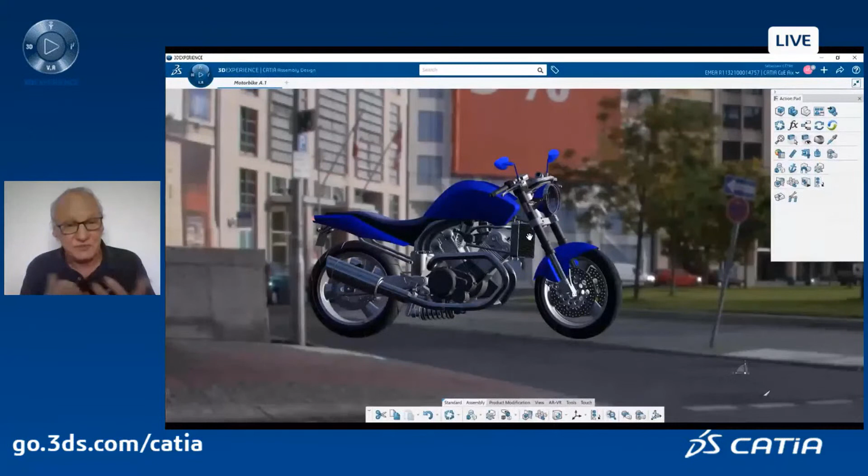not for commands. But I use something which is called the action pad, where you can gather all the commands that you are mainly using during a design. It can be commands from part design, which is solid modeling from CATIA, or commands from generative shape design, which is surface modeling from CATIA, or maybe other apps.

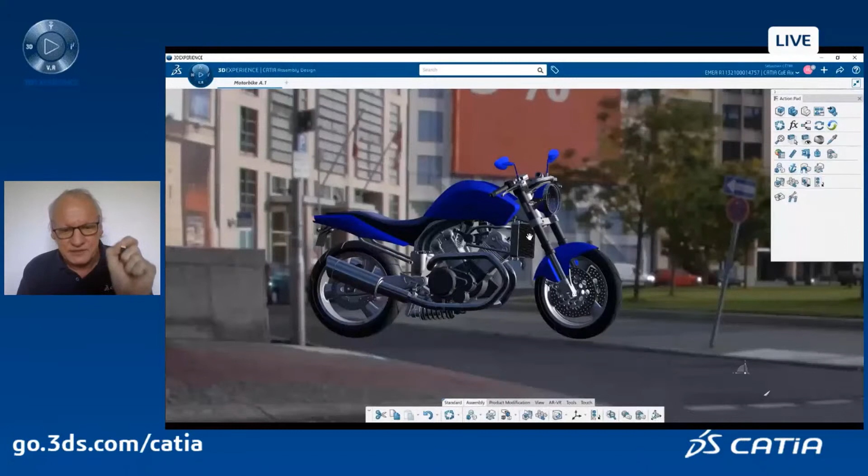And you can gather them in an action pad. They are default action pads, by the way. And you can either dock them, like what is done here. I docked them on the upper right side of my screen, or those action pads can be popped up just where my mouse is located, just by hitting the B key on the keyboard. It's not what I will use. I will use the docking capability of CATIA.

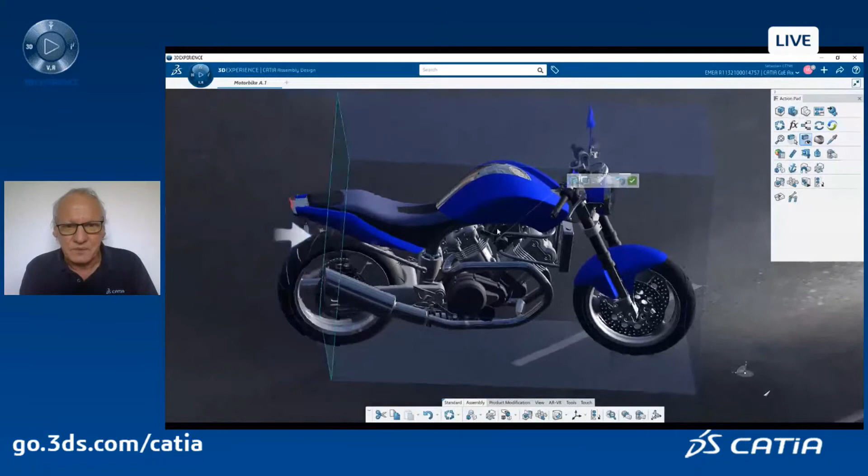Let's start. So this is my motorbike, and I want to work on this particular braking system, the brake caliper. Okay. First thing, I will select visually my context. I will define my working context, and you will see a very nice capability of 3DEXPERIENCE CATIA, which is a display of what I don't need in a ghost way. Okay, so what you see in dimmed or transparent white is in fact in ghost mode. But at least I know where I am in my full assembly.

And I can, for example, add a new view in my working environment. The view of this context can be shifted to another screen. You know, most CAD users today mainly use two screens. If you are using 3DEXPERIENCE CATIA, you use the two screens, either to display, for example, the assembly and your part, or some menus, because you can also dispatch some menus to other screens. So it's very, very flexible.

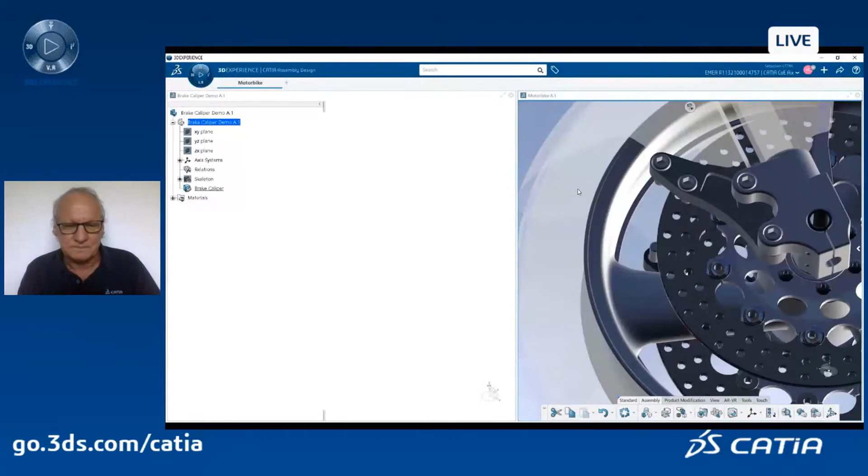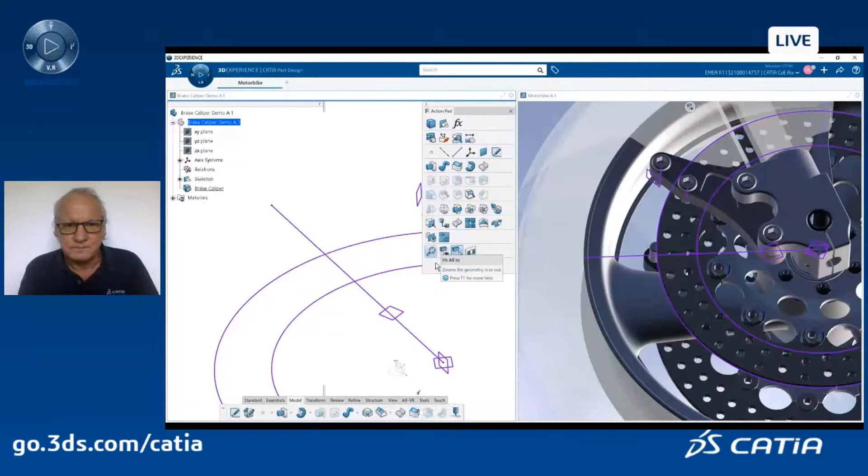So let's see what it does. So here I display, for example, my starting point. I start by defining a skeleton, which is a very traditional way of working with CATIA. And of course, I can see the skeleton at the part level, here on the left side of the screen, or at the assembly and context level on the right part of the screen. And there will be a permanent dual display of what I am designing. So let's start the design.

Maybe you did not see that, but I click on a plane, and automatically CATIA prompts me, what do you want to do with the plane? Probably you want to do a sketch. And I say yes. So I don't have to go and click on the sketch icon, which might be somewhere, maybe in my action pad, or maybe not.

You see here, sketch. Now I'm defining my sketch, and all my commands of the sketcher are also popping up in front of me, close to my mouse location and my click, proposing some commands depending on what I clicked. This is what we call the contextual immersive commands. Very nice capability. So I start my sketch. As you see, here I can also use the commands which are in the action bar, on the lower level of the screen.

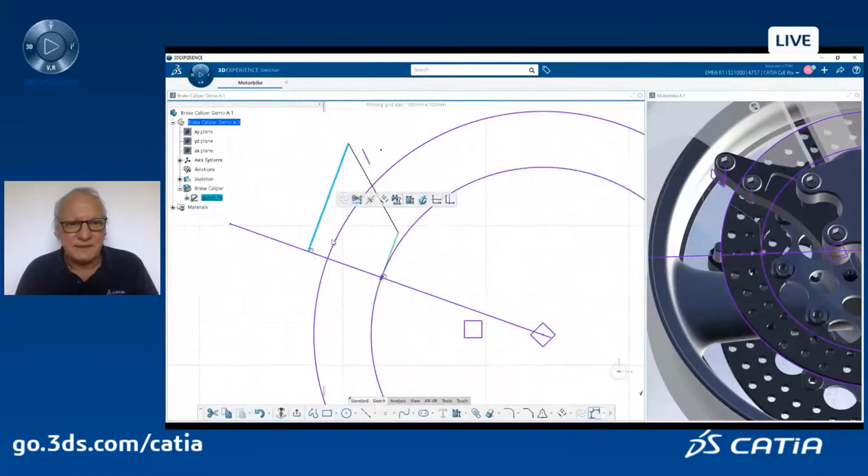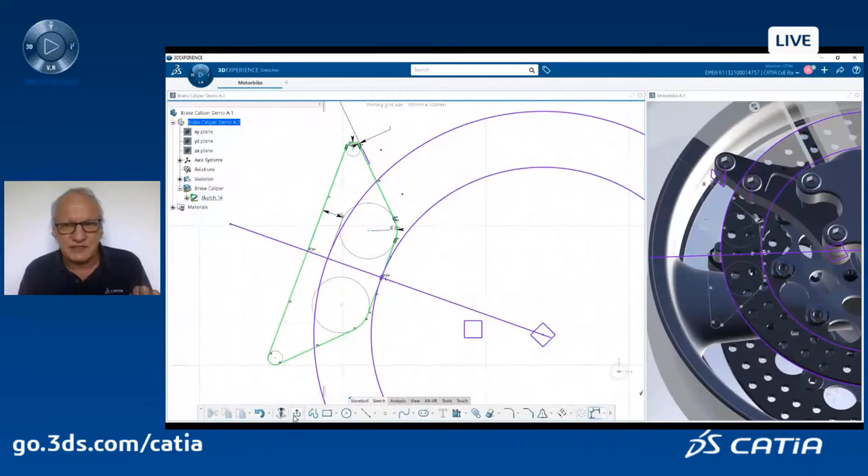This is typical design of my sketch. I define some constraints, some offsets. I define some fillets. I will also mirror this half sketch because I would like to have the complete sketch. And you see, I do not click. My mouse mileage is very limited. Okay. Here we go. I sketch. I do the mirror of this area, and now I leave the sketch. Okay. Of course, on the right side, you see exactly what I did at the sketch level.

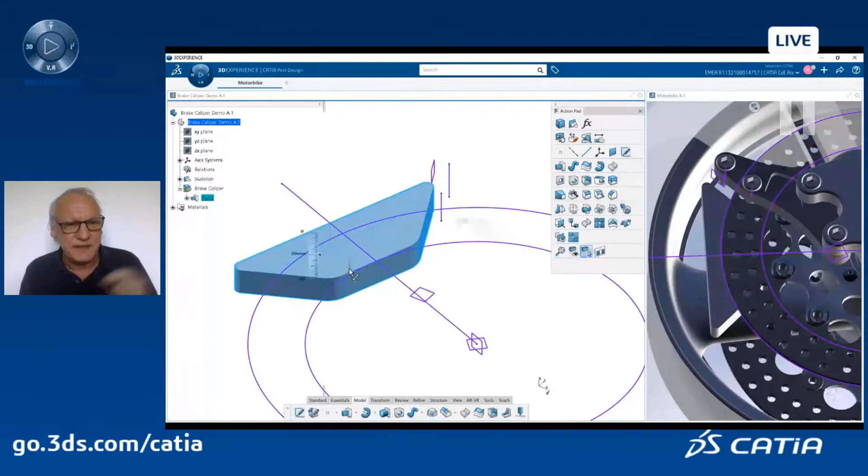Now I click on the sketch. The sketch was selected. So CATIA proposed to me, you have selected a sketch, maybe you want to make a pad, which makes sense. Yes, I want to make a pad. And then I just need to select the direction of the extrusion and the value, the thickness of the pad. And I directly type in the command, and CATIA creates a feature pad in the spec tree.

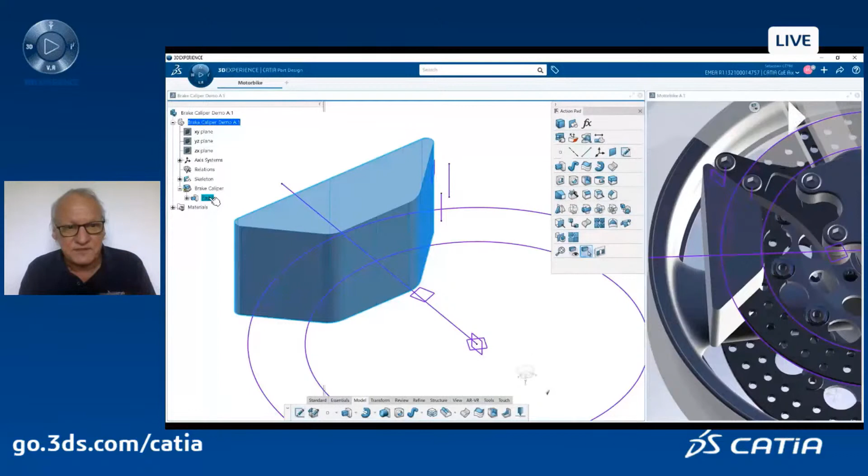Okay? You could have done exactly the same with a traditional, let's say, CATIA V5 way, where you click on the command pad, you have a dialog box popping up, you enter values, and then the feature pad is aggregated in the spec tree. But here it's much faster. Here you see the pad dialog box that you can use if you want to add more advanced details in your pad feature.

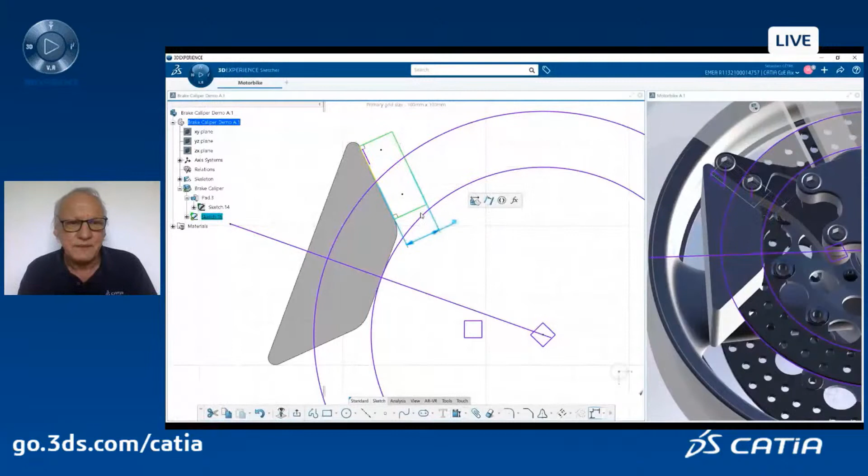Here we go. I click on this plane. I accept the sketch. Here I just project an edge of this newly created pad into the plane. And I just add some constraints on my sketch to fix it, to dimension it. And I will create, as I did earlier, another pad. This is the value of my fillet.

Here's the sketch. As the sketch was constructed on a face of a solid, now I have two options. Do you want to create a pad or do you want to create a pocket? I create a pad, I select the direction and the thickness very easily. No dialog box, just everything is done directly on the graphics in 3D.

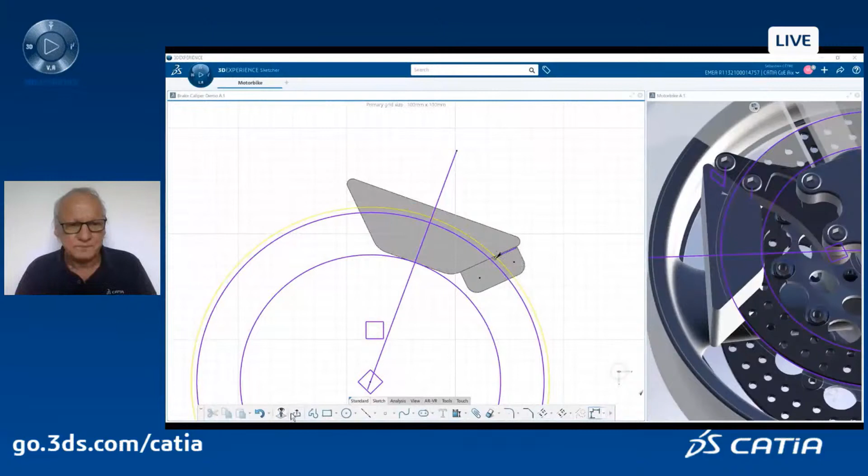I continue the design of my sketch and my solid. I am here in the sketcher of part design. I create some offsets. You see, it's very simple, very straightforward. At any time, if you need more advanced capability, you can use the advanced capability of your action pad. You can also hide the action pad.

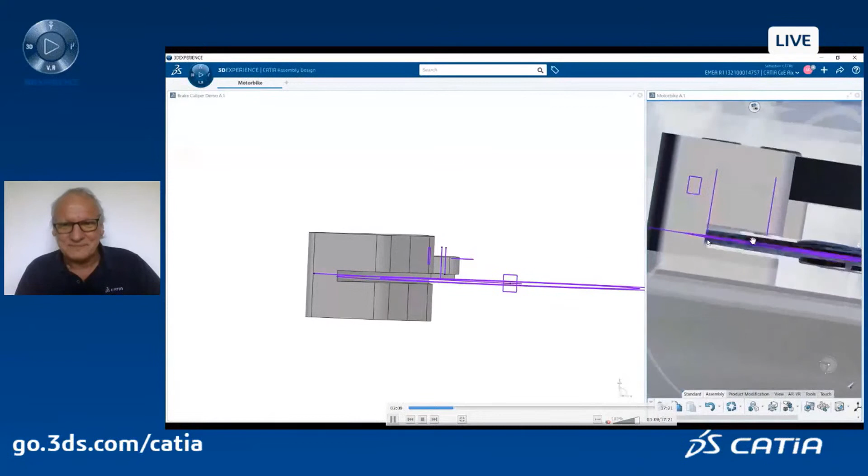Here, I just create a pocket to remove some material inside this block. And you see here on the screen why I did that, because I wanted to take into account the brake disc itself. Makes sense. So it's why the context is very important. You never design a part alone. It's always inside a context within a given assembly.

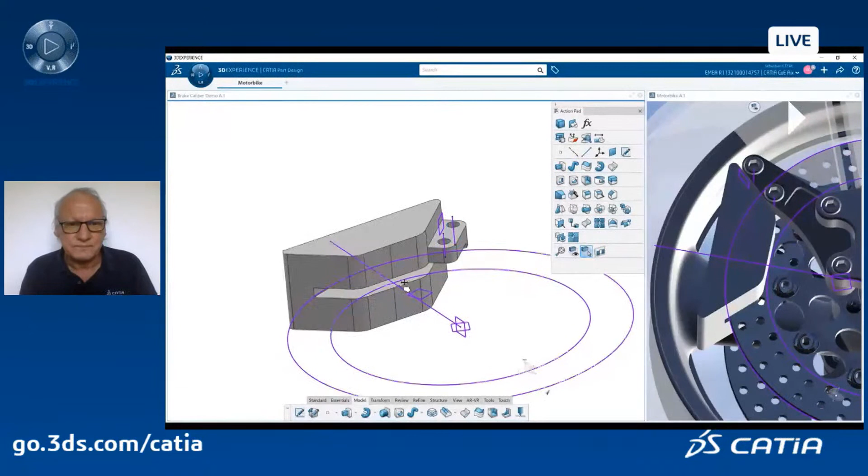Here, by just clicking on a face and this line, I can create a hole because the inputs were the direction of the hole and the starting face. I just select regular holes. Here we go.

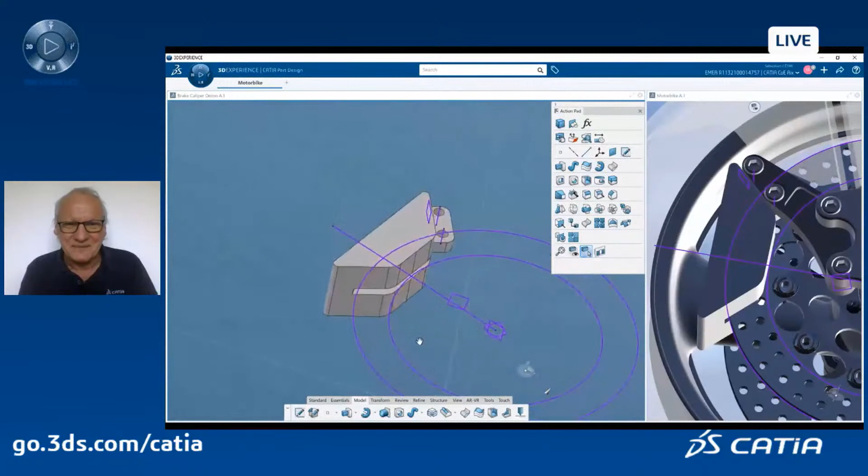Very nice capability also of 3DEXPERIENCE CATIA is that I can change at any time what we call ambience. You will see what I mean. An ambience can be, for example, a dark blue background. Traditional way of working with some CAD tools. But I can have a more fancy way. Maybe my part is designed inside a given context. You can define your own context. And I can come back to the basic, which is white in this particular case.

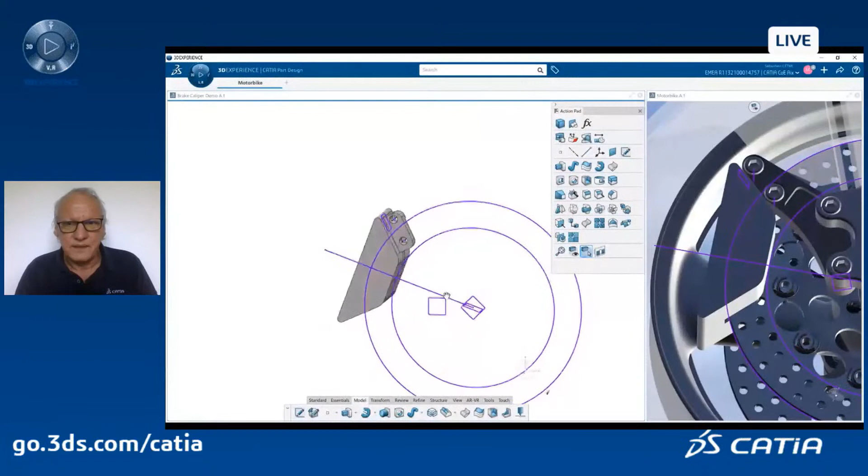Now that I'm okay with that, I will just erase my context view and just work with the design view. Here I can at any time undock some commands and dock them where I want on the screen. It's very simple. So you see here the refine command with the chamfer fillets.

I can add as many commands where I want, and those menus can be also attached to another screen, for example, if you have two screens. And of course, if I am a little bit messy, I can come back to the predefined position of those action bars.

Here, I create now a new body, which is my brake pad, because you will see that in this particular way of working, I will just, at a concept level, work in part design, in one part, and create multiple bodies, which will be, in fact, my future parts within a given assembly. And you will see how easily we can create from a part with bodies, an assembly with parts. Let's have a look, but let's first continue the job.

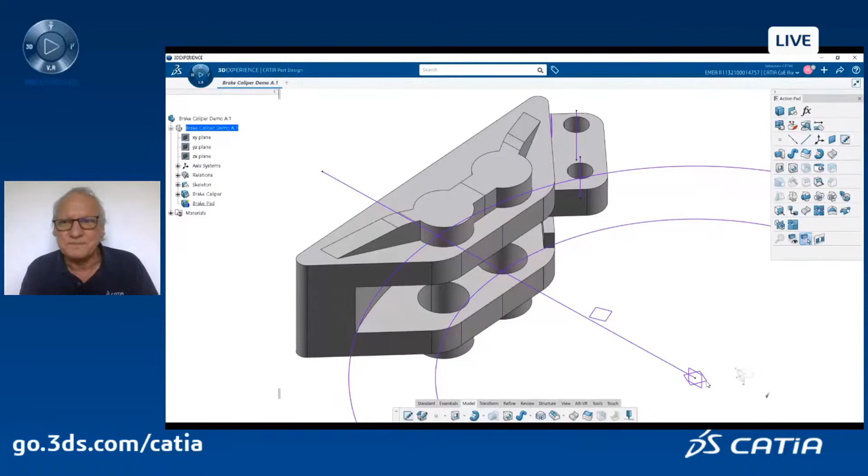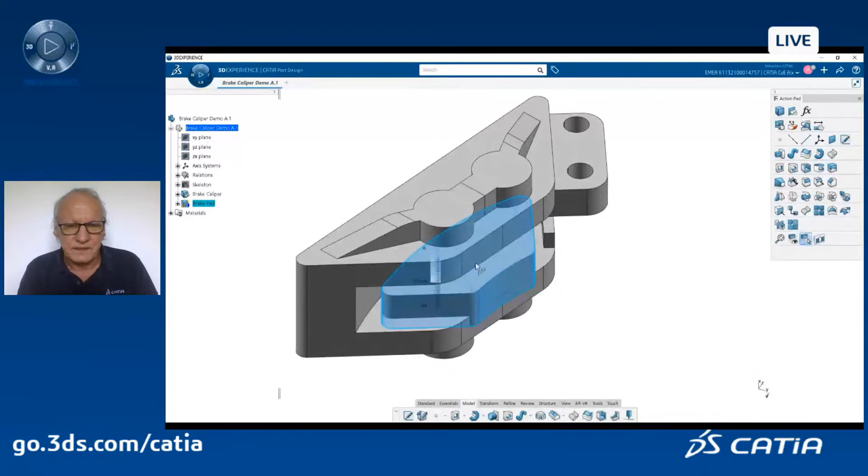Here we go. I create a sketch. I design my sketch. I guess now you are familiar with that. It's very easily done. And I will just create the shape of my pad. You see, as I click on my shape, I can create a pad. Here we go. And this is in my brake pad, another body.

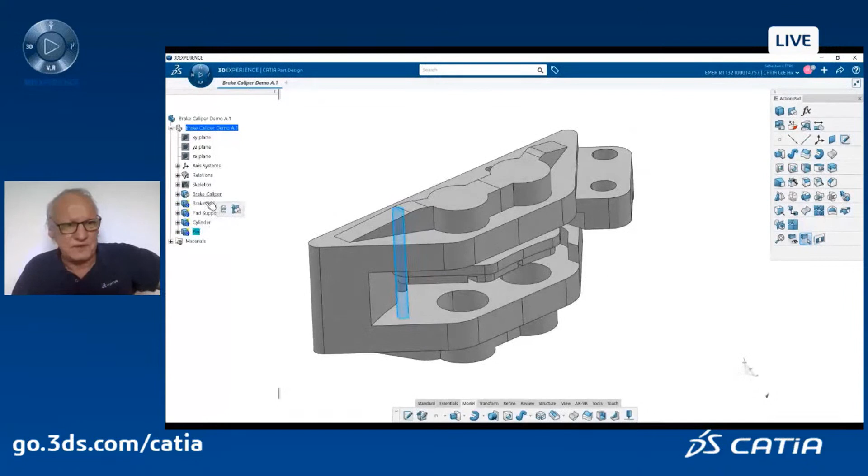So I continue the job. I create the exact brake pad after having created the pad support. So I have now three bodies, but I also created the cylinders, which will push on the pad support, and a pin which is guiding the pad support to push the brake pad. Okay, those are all my bodies.

Now I just want to start to detail or refine a little bit more the main housing of the brake caliper. But before that, I can use, very simply, wall thickness analysis. I am in part design, and here I just detect that there are some areas which are a little bit too thin. Okay, no problem.

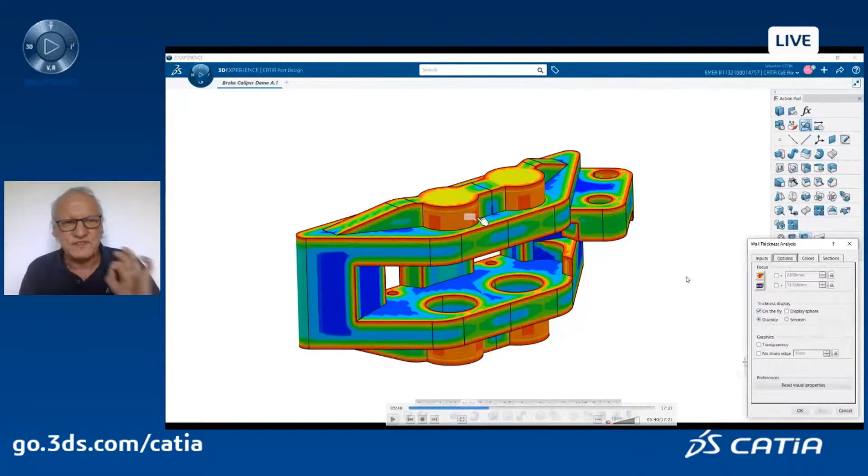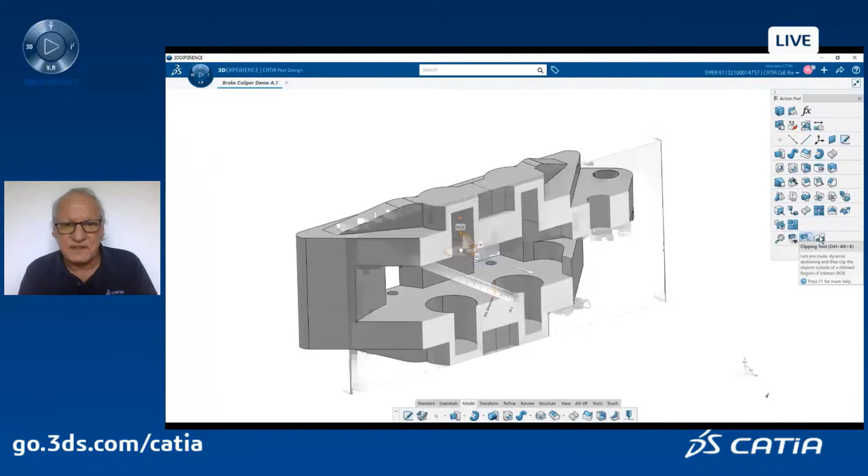I will just turn on a clipping. This is also very cool in 3DEXPERIENCE CATIA, the clipping tool. So you select a clipping plane, and this clipping view is permanent. You can continue to work at any time with this clipping view. Quite useful in this particular case. Of course, at any time, you can also turn off the clipping view. Here we go. Now I just zoom in.

Something very important, as you see here, I click on these faces and I selected this small footprints icon. And this is in fact a way to navigate with the parents and the children of this feature, or this face. And here, one of the parents is a sketch. So I can automatically display the sketch in 3D.

I'm not forced to go to the 3D plane which was containing the sketch, and I can change, for example, this radius 14 to 16 to just make it thicker. Here we go.

I will turn off the clipping because now I'm fine, and I just double check my design by running another wall thickness analysis. Looks good to me. There is no more red area with thin area in this portion of the solid.

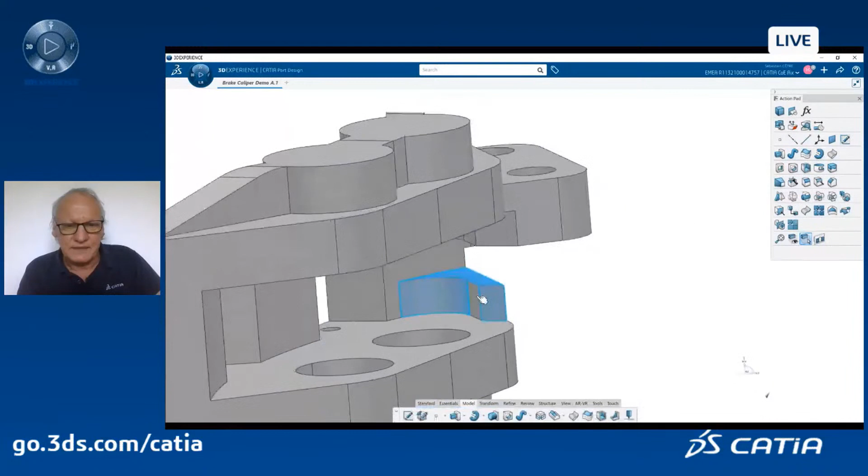Now I use another command which is called remove face. It is in my action pad because I use this quite a lot, at least as a user. So I take those faces, remove, and the solid is updated accordingly. And I will continue the job. Here we go. And I will add some holes, okay?

So after having added a small pad, I will first start to create a fillet. You will see how easy it is to create a fillet. I just click on an edge. As I click on an edge, the fillet command is prompted. I will use the same fillet on the two edges. And you can see I have a dynamic display of the fillet, and I can change quickly the value of the fillet to the one I was looking for. No dialog box popping up, filling the screen with something that hides the 3D from my view.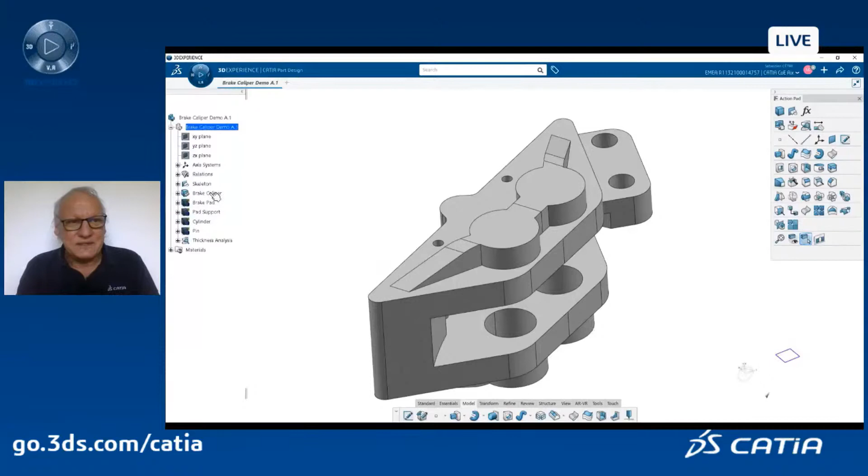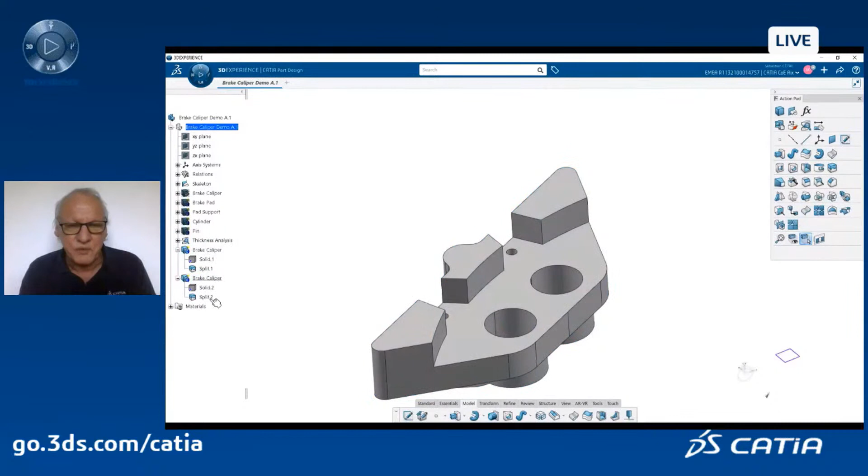Now let's go and continue the job. And what I'm doing here right now is just cutting this piece into symmetrical pieces. Okay, so it's very simple. I copy paste my body as result with link in a part. And then we'll cut out the first part and cut on the other side the other part. So I will have a lower brake caliper and an upper brake caliper, two bodies, which are symmetrical. Okay, so this is a brake caliper body, lower side, and the brake caliper upper side body. Here we go.

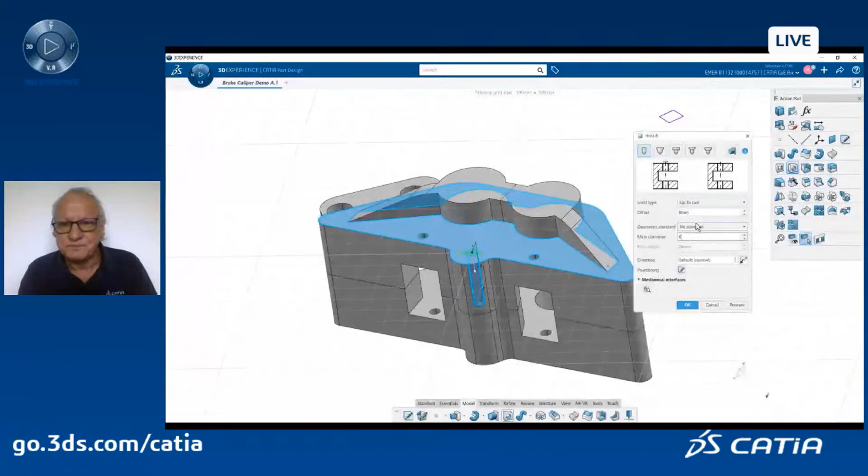Looks fine to me. And in this particular situation, I will add the holes. Okay. So here I select a face, I select a point. So I will create a hole, which is an up to next hole. Okay. With a given diameter, 6. Here we go. I will do the same at this particular location, at this point here. Perfect. And I will do another one here at this particular location. I'm almost fine, but as you can see, this hole is not very good, okay?

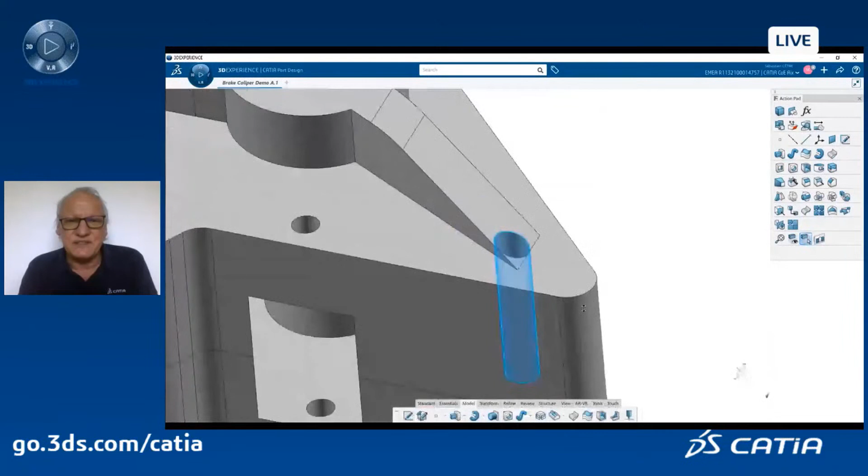So I would like to replace this hole by a counterbore hole; it makes more sense to add a counterbore here, okay? So I just select the hole, change the parameters, use the standard I would like to use, because all those are standardized, of course, the dimension and the fillets and all this stuff. And now this feature hole is quite complex. It has a lot of different attributes. And with a simple click, you will see,

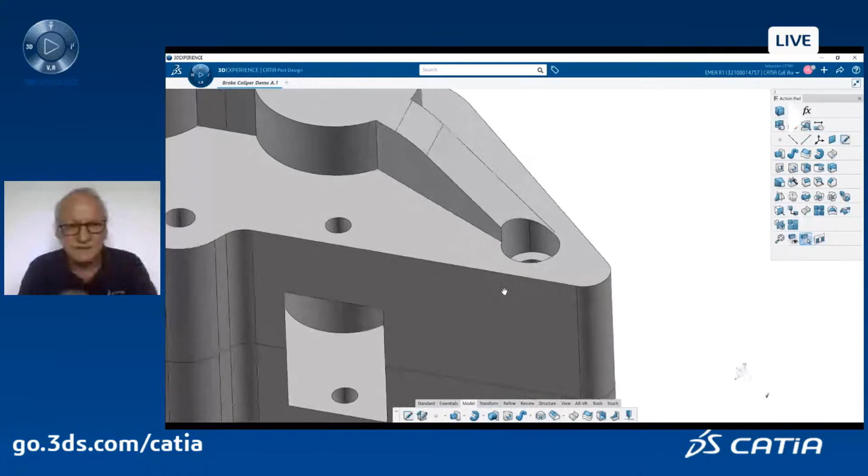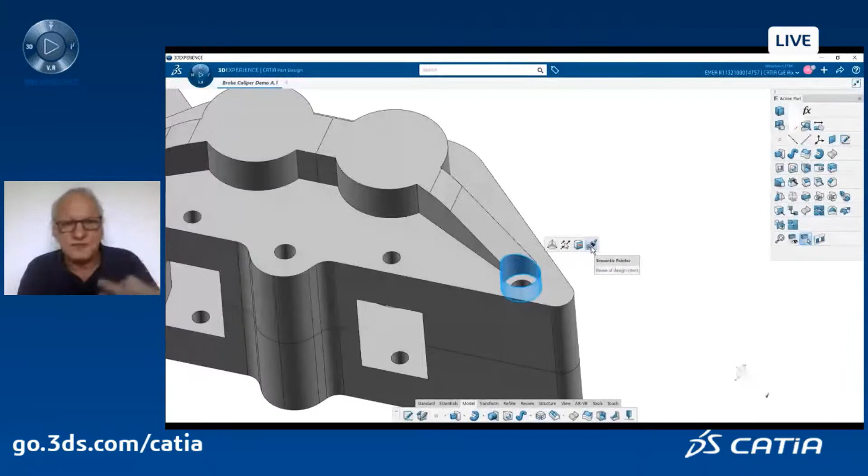I will use a semantic painter. So I click on the hole. It's a feature hole. It works also on other features of 3DEXPERIENCE CATIA Part Design. I have this semantic painter here. It's like if I was copying not the color, but the semantic, the feature parameters of this hole. And then I can drop the same parameters to the other holes in my part. Here we go. Very, very simple, very, very useful. Looks nice to me.

Obviously, this part will be cast, so not milled. So now I start to enter into the detailed design of this part, and I will just create some draft. So you can use a classical draft command if you are familiar with CATIA V5, the draft command of CATIA V5, it's very similar. So you select the face you would like to draft, you select the pulling direction, the draft direction, you select the neutral surface and an angle. Here I will put 5 degrees or 3 degrees. There we go. Let's put 3.

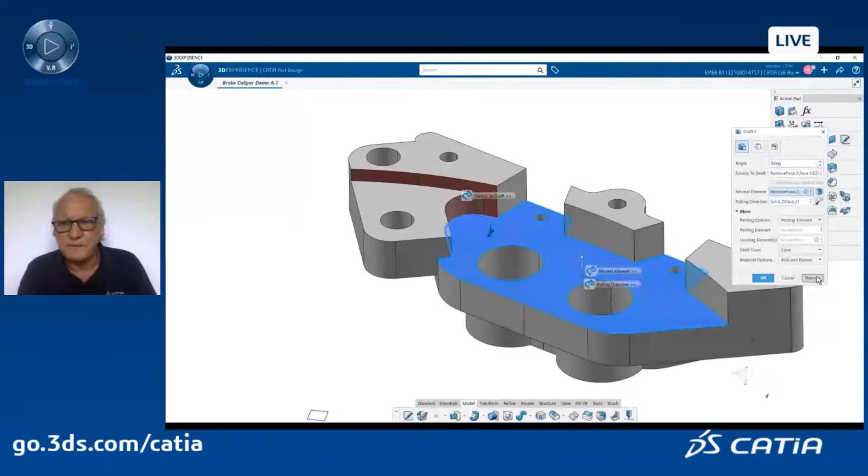This is my draft, but what is nice in 3DEXPERIENCE CATIA is that we can do exactly the same for the complete part in one shot. It's called auto draft. So you select the auto draft command, you type in the same value, the angle, the pulling direction, and also you have to select the faces you do not want to be drafted. In my particular case, all the holes. So I just select them, those will not be drafted, but every other face will be drafted, okay, in one shot, in one feature. Nice job.

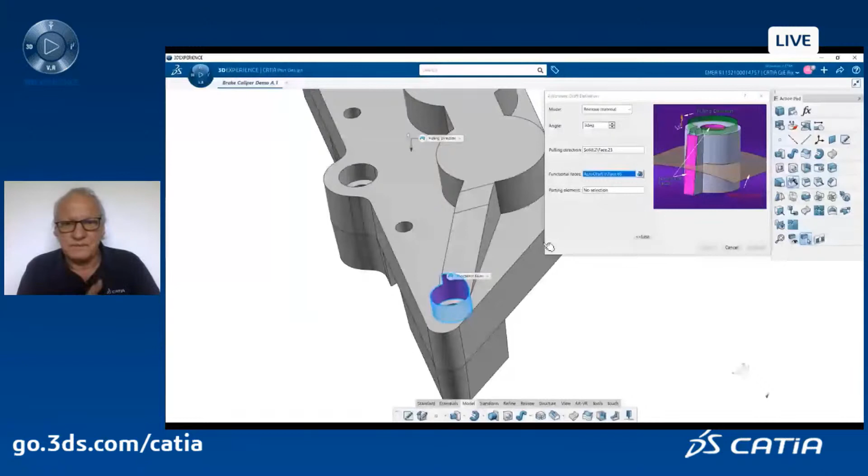I have to do the same on the other direction. So select my angle, the same angle in this case, select my pulling direction, opposite direction of course, select the faces I don't want to be drafted, and of course the parting element. Here we go. Simple clicks, one command, one feature. This is my parting element. Looks good to me. Nice job.

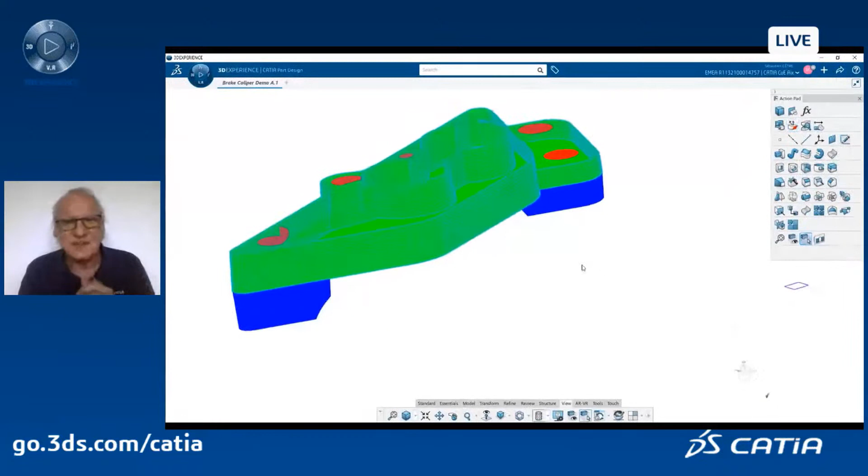Okay. Just do a wall thickness analysis. Sorry, not a wall thickness, a draft analysis to check that everything's fine. Okay, the drafts are on the right side. They have the right angle, so perfect.

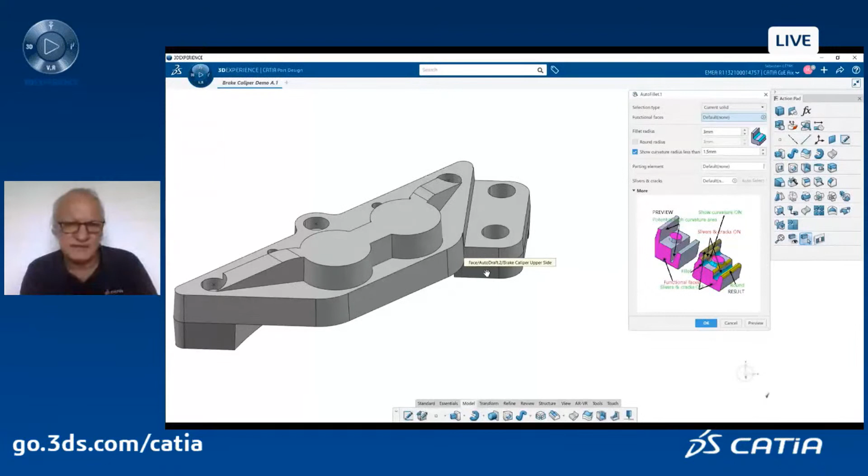And to finish the job, I will also use a magic command of CATIA, which is auto fillet. 3DEXPERIENCE CATIA auto fillet. Those fillets are not functional fillets, just manufacturing fillets. I just want to put a fillet of 1 millimeter on every single sharp edge of this design. It's exactly what this command will do. But you have to select the faces you do not want to be filleted, obviously all the holes in my case. Everything else will be rounded.

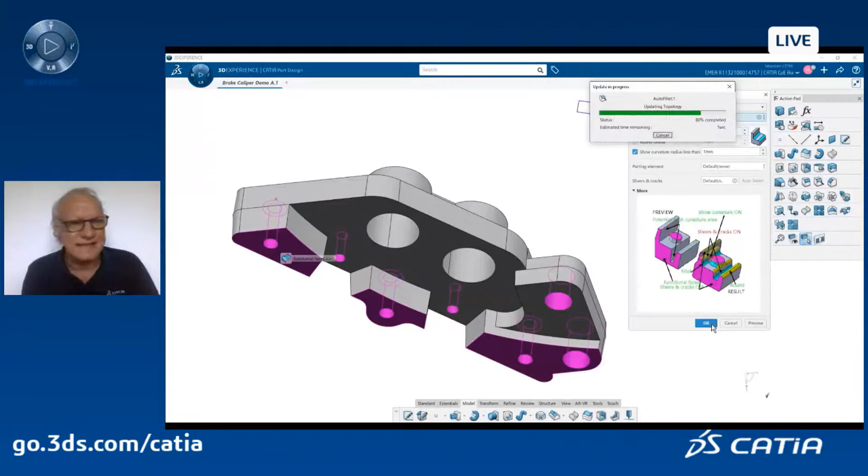Again, one single feature. If you have to do the same job without this command, it will probably take you much more time than me. So I put a 1 millimeter fillet everywhere. The command has not been accelerated. It's really the time it takes to do. Here we go. And every single sharp edge has been rounded. So my part is ready to be casted.

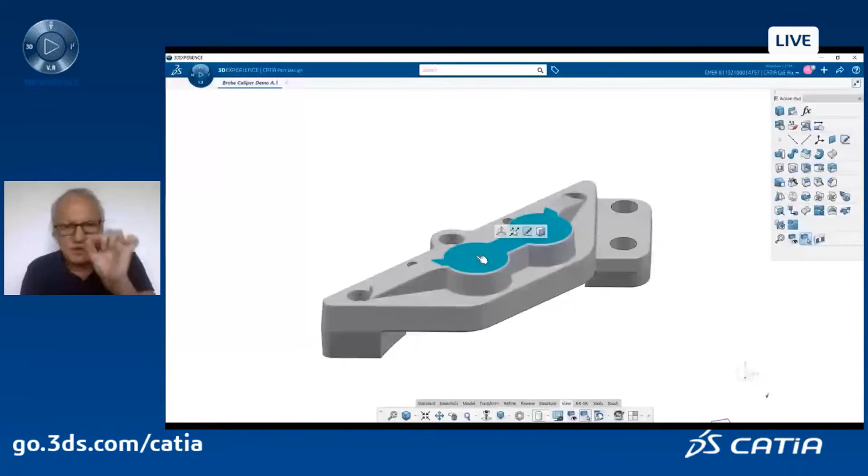Just to finish, I will add a small text, a small engraving. Can be an emboss, but here I will put an engraving. So it's also a capability which is available in 3DEXPERIENCE CATIA. You type in the text, you select the font, you select the dimension, you position and you constrain the text, because this is a capability of the sketcher. So you have to position it versus, for example, an edge of a part.

There we go. And then what I will do once the text is located at the right position, I will just project it and create, in fact, a small pocket. I could have created a pad if I wanted not an engraving, but an embossing. Here we go. Perfect. Good job.

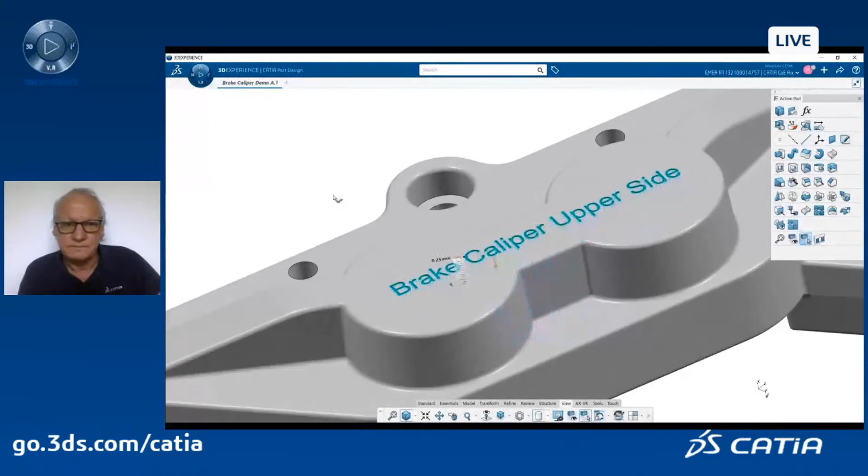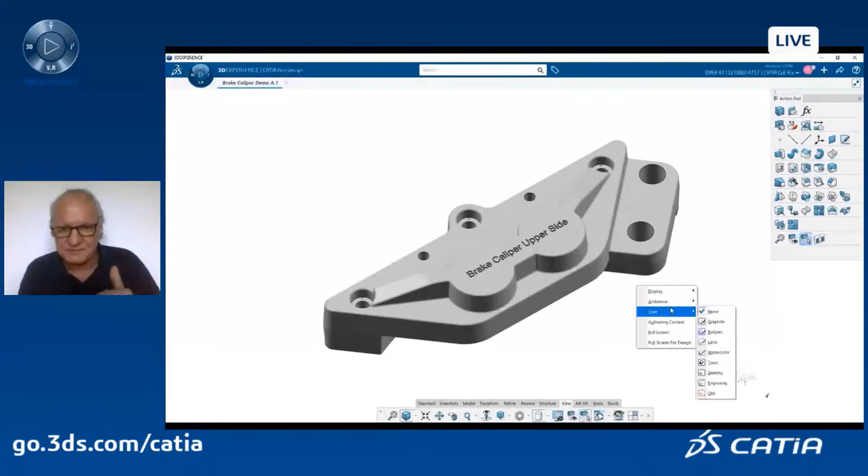If I want to, for example, share with my suppliers, my colleagues, my customer a nice, let's say, fancy view of this product, I can again change not the ambience, but the style of my display. For example, this type of display, or why not, old-fashioned stuff, but why not, to show the part and maybe use it for a marketing purpose. Let's go back to the traditional design style.

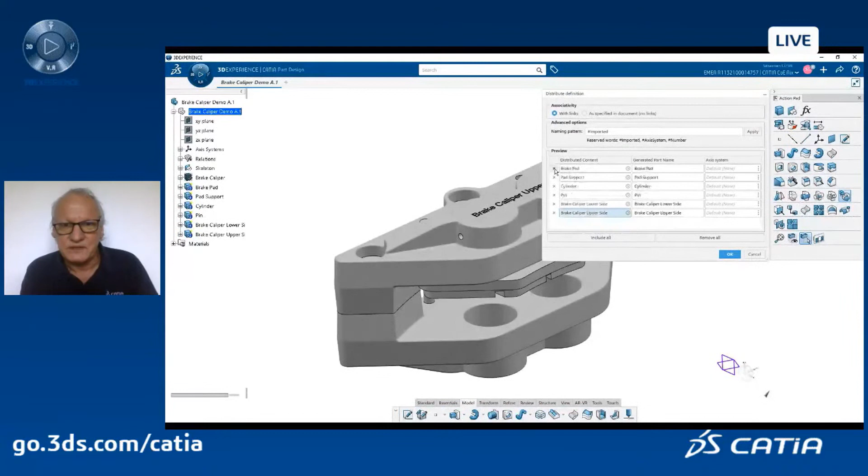So I have my various elements, my various bodies for my assembly. And then I will use the magic command of 3DEXPERIENCE CATIA called distribute. If you look at this table, you will see all the content of the spec tree. All features will be there. Of course, I don't want to distribute the skeleton or axis system or whatever. So I will just select the bodies and remove some of the features. And in one command, CATIA is creating an assembly, distributing in every single part all those bodies. It's very cool. If you have to do that traditionally, it will take a little bit more time.

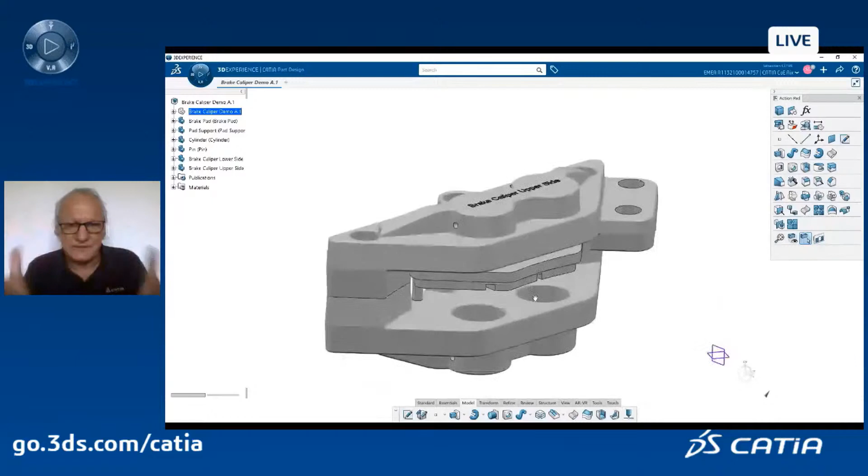So what you saw here was a very nice way of creating 3D models and assemblies by just starting from a conceptual part, because it's easy to modify. If you do a design change, it will be much easier and faster to update and so on.

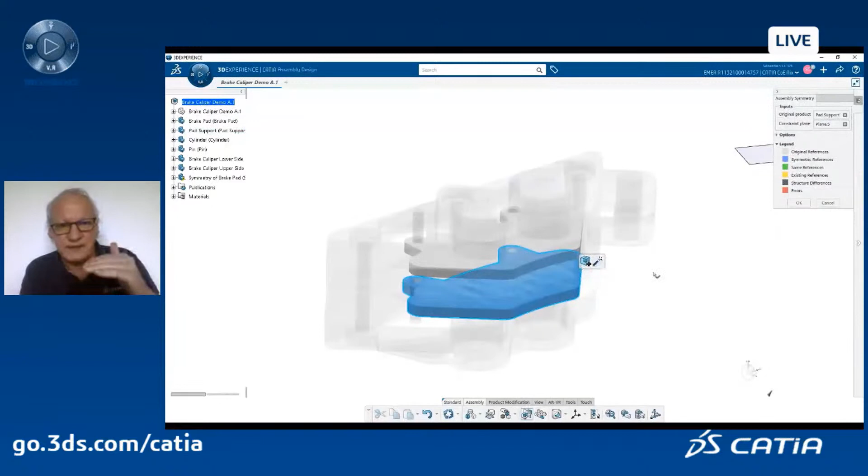And then once I have my assembly, I can use, for example, a very nice capability, which is the mirror or symmetry capability of assembly design, where you can select the part which has to be mirrored. Either it's really a mirror part or the same part, but rotated and translated, because it will be the same reference in the bill of material. And as you saw for the cylinders, there are two symmetries along two different planes. So very easily, you finalize the design of your assembly to make something exactly matching your request.

And we will finish the design of this assembly by adding some, what we call engineering connections, to make a quick kinematic analysis of this assembly. Let's see how it works. So very easily, you can define constraints. Okay, for example, this is fixed.

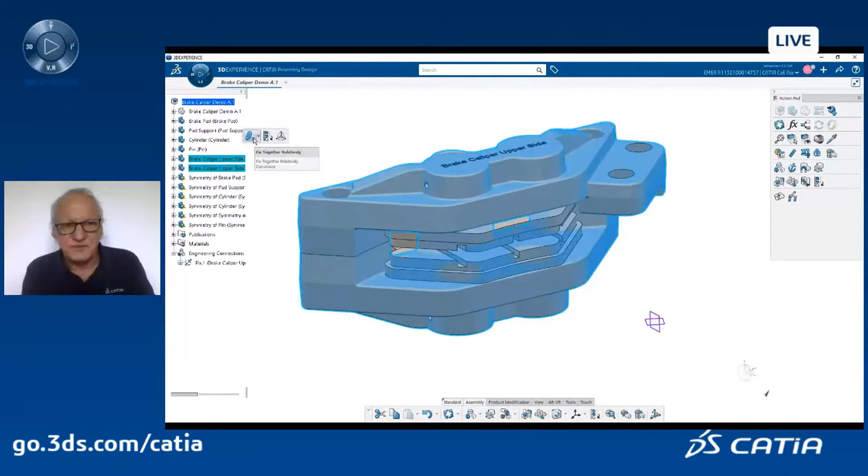This is also fixed together. Okay, so you will see what we are doing. The idea is that the cylinders which are inside this body are pushing the pad support, which is pushing the brake pad along the guide.

So here, just by using again the pop-up menu, once I selected the face, I can select the type of engineering connection I want, or let's say the type of connection I want between the parts. Here I will again fix them together. This one and this one, fix them together, because one is pushing the other, stick to the other.

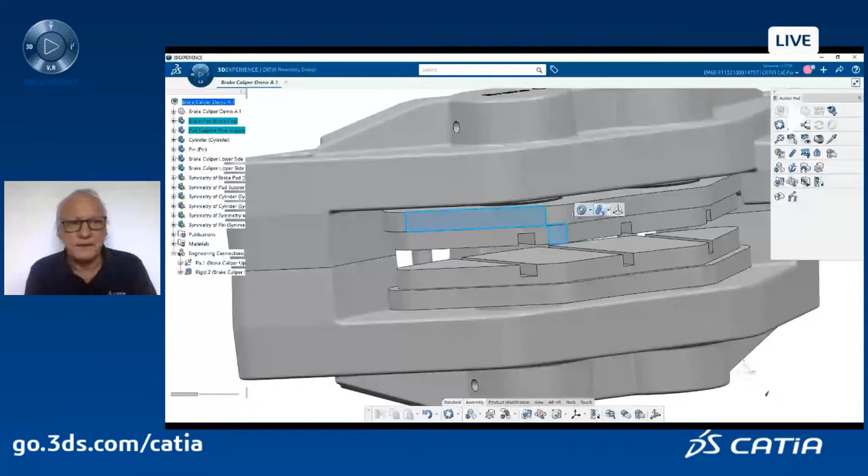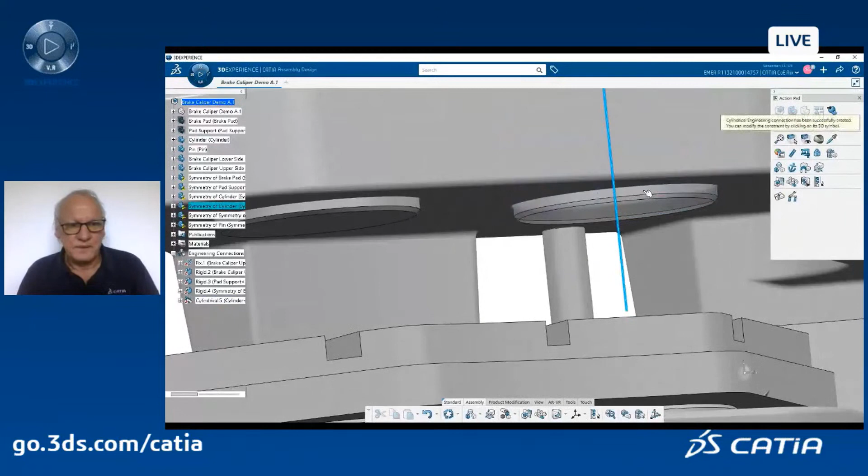Then I just hide what I don't need, and I define, for example, a coincidence between this cylinder and the hole where it is guided. So I select the face. I say coincidence with this axis, which is the axis of the hole. I do the same for the other cylinder. And as you can see, as I click on a cylindrical face, it created here a cylindrical connection.

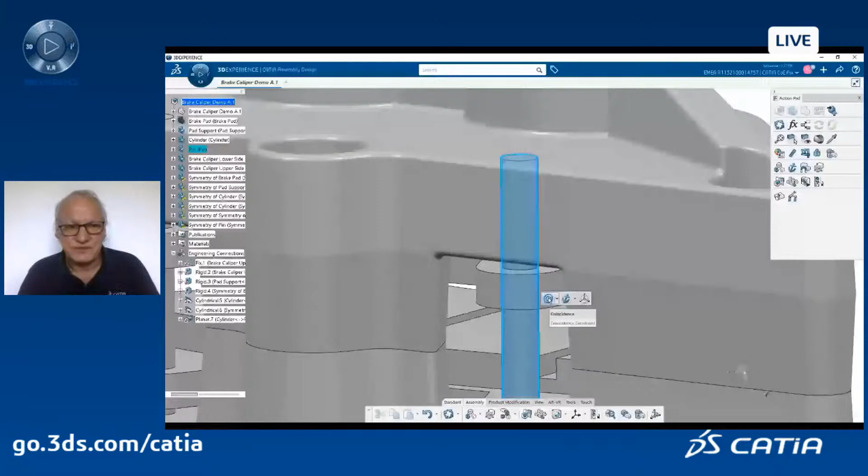I continue the job, because I have now to define the connection between the pins which are guiding the two brake pads. So those are coincidence, but it's not only coincidence that I want, because otherwise I will slide only. I will add another constraint, a very logical one. You will see which one. Again, no big dialog box popping up, just clicking on the 3D and selecting options.

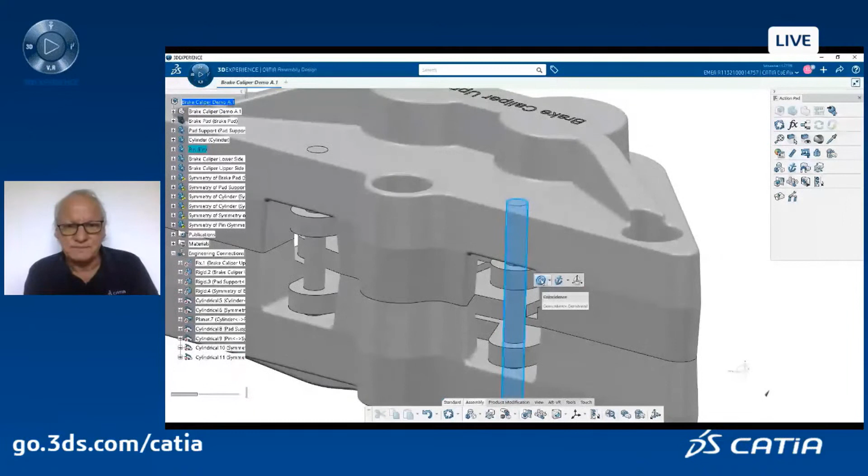What I put here is, in fact, something different. I will add a contact, because in fact the cylinders are pushing and are in contact with the pad. So once you select, for example, a contact on top of a cylindrical connection, it will enrich the cylindrical definition and convert the cylindrical plus contact into a revolute connection. This is quite smart and quite nice.

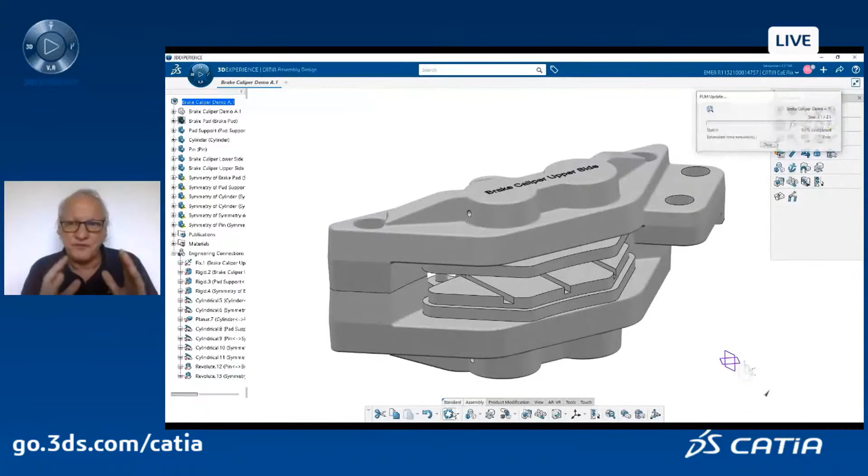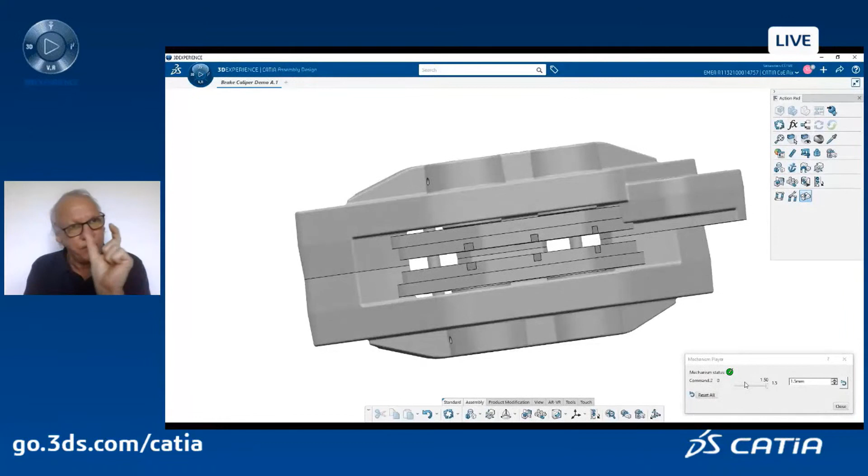So you can easily define constraints between various parts inside your assembly, and what you will get for free is the kinematics. Compared to V5, where you define assembly constraints and then you enter another app called Kinematic where you define the kinematic joints, in 3DEXPERIENCE CATIA everything is done in one shot. Then you just have to add, for example, an input. I select what part is moving and the magnitude of the motion, and you can display it. So you really get kinematics for free when designing an assembly with 3DEXPERIENCE CATIA.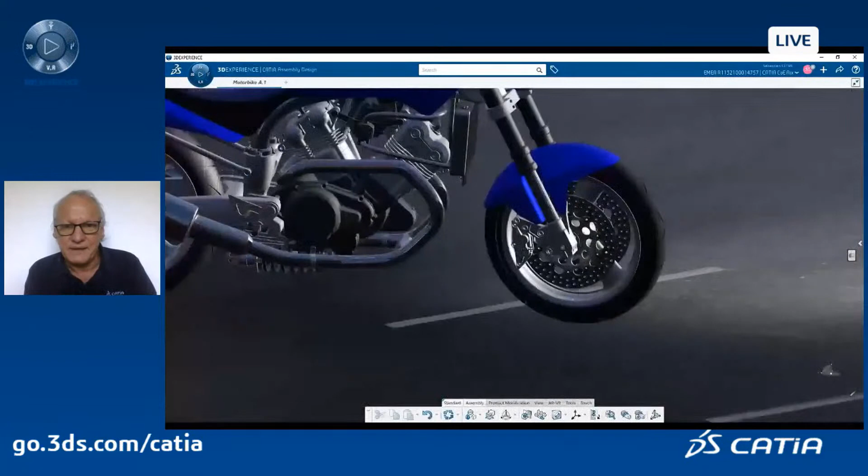And of course, we can show this assembly in motion. We can analyze the motion within the complete context of my braking system. Let's move it. Just move the mechanism. Here we go.

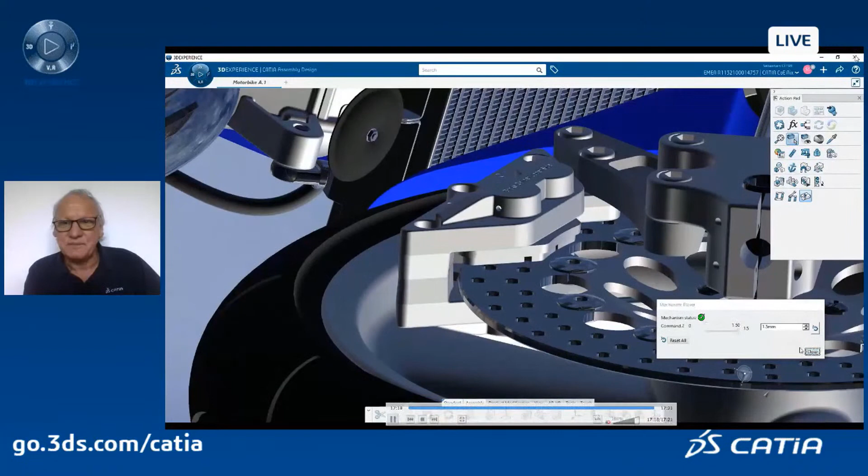So that's it for the first part of this presentation. You saw how easily I could design not a simple part. There are drafts, a lot of fillets, some mechanism, connections, constraints, and it took me 17 minutes. So not bad. Now, to finish this webinar, I will show you a little bit more advanced capability, more regarding geometry than pure mechanical design.

Let's go. A typical scenario is I receive a part from my supplier, which is this fork bracket. So he sent me the part. It was this design here. I want to check if this part is a new version of the design supplied by my customer or suppliers. But very strangely, it's just a set of surfaces, not a solid. So maybe there was some issue during the conversion, or maybe the input data was not that good. So I will just try to join this set of surfaces.

You can see there is a geometrical set, for those who are familiar with CATIA. So I just join them. No problem, looks like there is no problem. Then I will create a closed surface, so convert this set of joined surfaces into a solid. There is an issue. You cannot create a solid out of that. Not a problem.

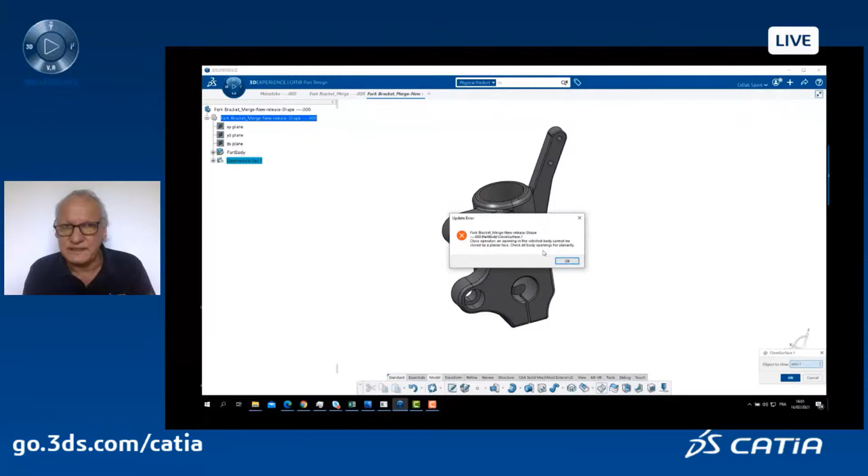So I will now use a very nice command in 3DEXPERIENCE CATIA, which is called the local healing. First of all, I display where the problems are. You can see here in green there are some gaps between the surfaces, so we cannot stitch them together at a given accuracy. Again, not a problem.

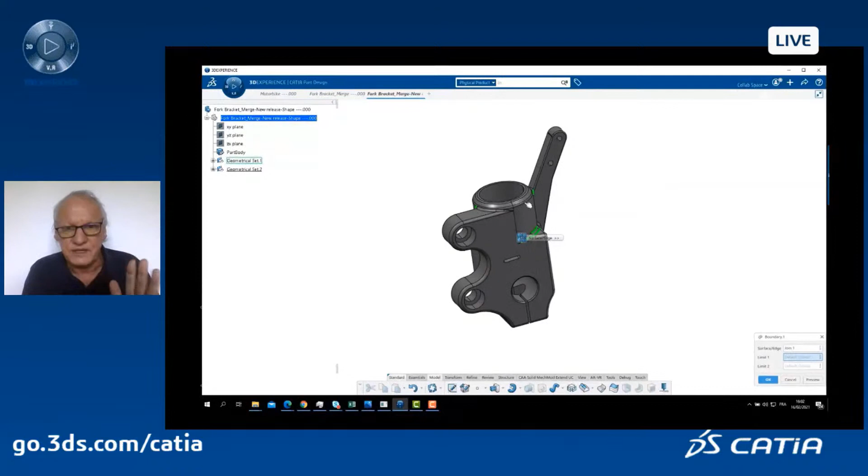Let's go and use this nice command called local healing. What it will do, it's very simple. It will just heal locally the surfaces. It will not touch the rest of the surfaces, just those ones which need to be put together.

But maybe you can see there is here a plane. I don't want the plane to be modified. Okay, the plane is a plane, so I will freeze the plane. So the plane will stay as a plane. So I freeze this plane, planar surface, and I will just move the other one. Okay. Now I will just add joining distance. Here we go. And if I create now my closed surface to make a solid, voila, it's working fine.

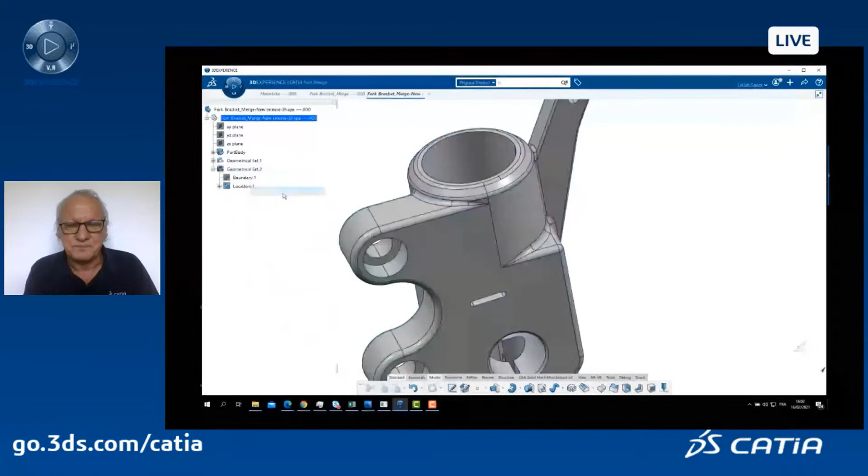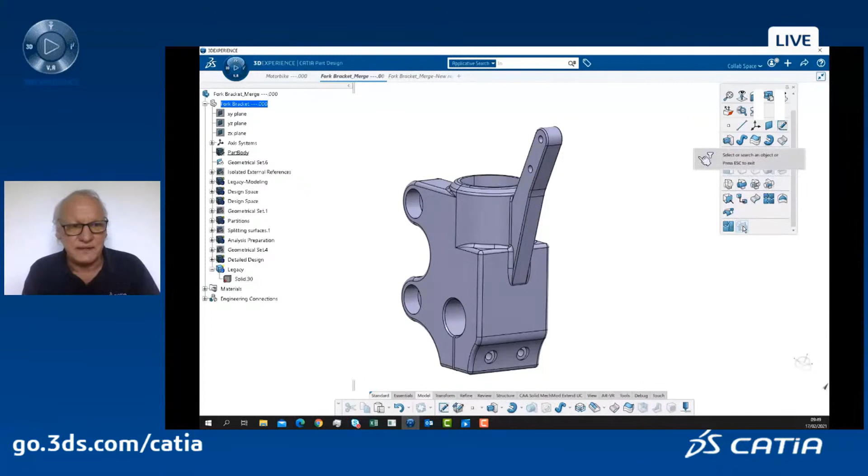That's the very first stuff you can do. The second stuff that you can do is that, okay, I receive a new version. I clean because there were some issues. Now I want to compare what has been modified between my previous version, the one I showed you at the very beginning of the presentation, and this one that I just cleaned. So there is a nice command as well in 3DEXPERIENCE CATIA called compare. So I compare the first one with the previous one.

And you can see here in the screen a special window where I can display the differences between the first part and the new version. And I can highlight if there are some differences and where those differences are. You can see here that there is a small pocket which has been added in one version versus the other.

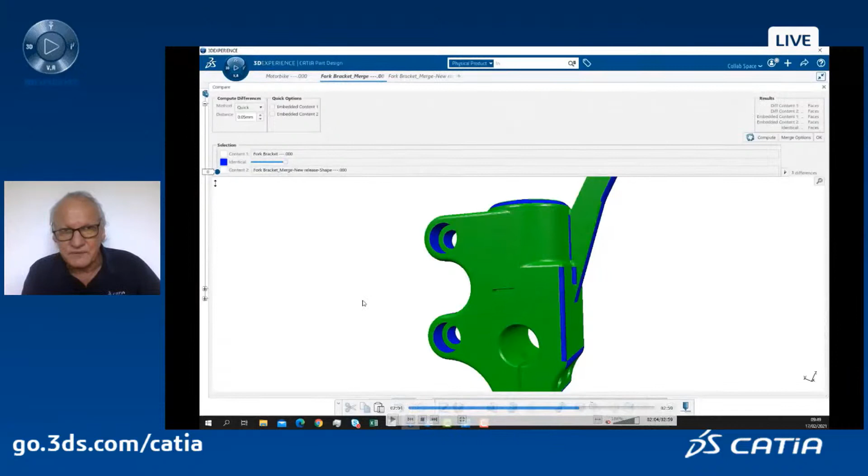Okay. Now what is very nice is that I can automatically extract from the new version what needs to be added to the previous one. Okay. I will extract just what is necessary. I will keep the rest of the geometry. It's what we call here when we do the compute. So I will just extract the faces which are different, which is the big one and the small pockets here. Okay. Here we go. I select these options.

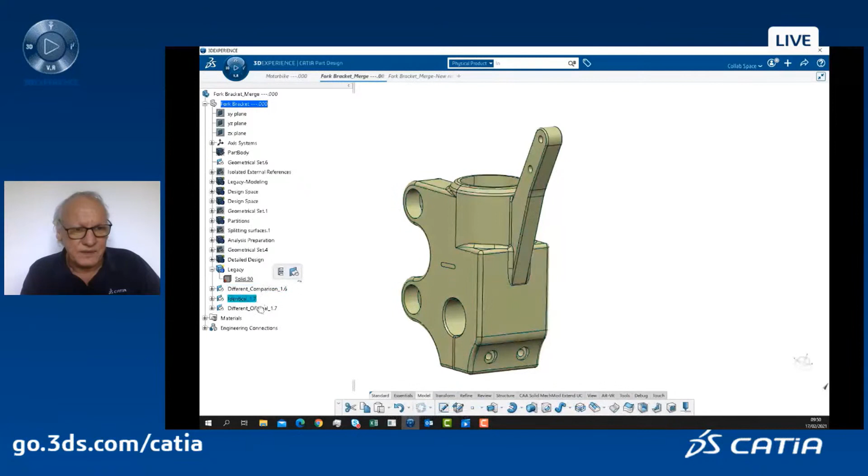And now you will see in the spec tree that I have 3 geometrical sets with what is identical between the two versions, what is specific to the first version, and what is specific to the new version. I will just hide what is not necessary. Just keep what has been changed. You see here in yellow.

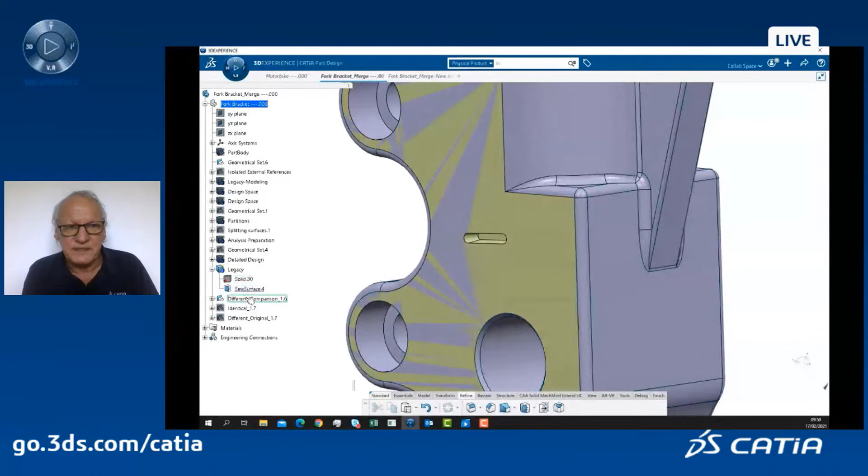And what I will do, I will just sew this new surface or set of surfaces, which is a planar surface with the oblong, to the previous solid. So this is a sew command. And automatically we create the update of the solid. Very nice capability. It helps a lot because sometimes the differences are not so obvious between one version of the same model and the second version. And of course, I can work and check my part in my context.

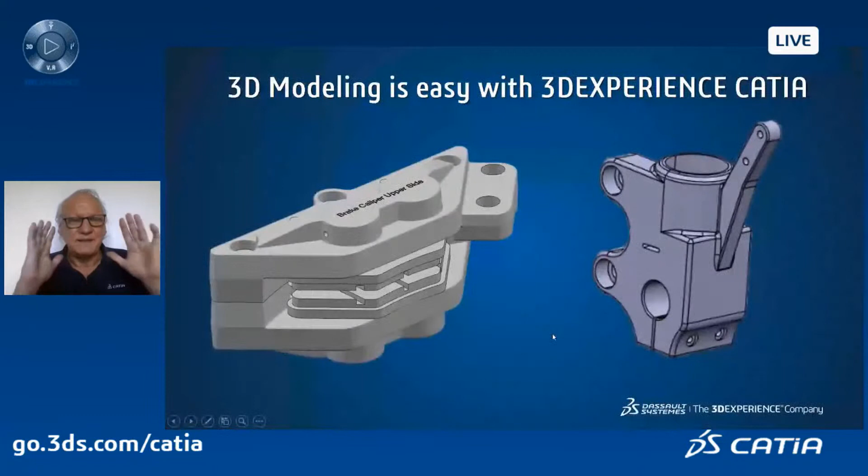So that's it for me. The conclusion. First, I hope you understood that 3DEXPERIENCE CATIA has a very intuitive user interface. You pick in 3D and you are guided. It's very effective, very few mouse clicks, very small mouse mileage. Don't go from one side to the other side of the screen and so on. And on top of that, you can even customize more than what is proposed by default if you have very particular commands that you are using a lot.

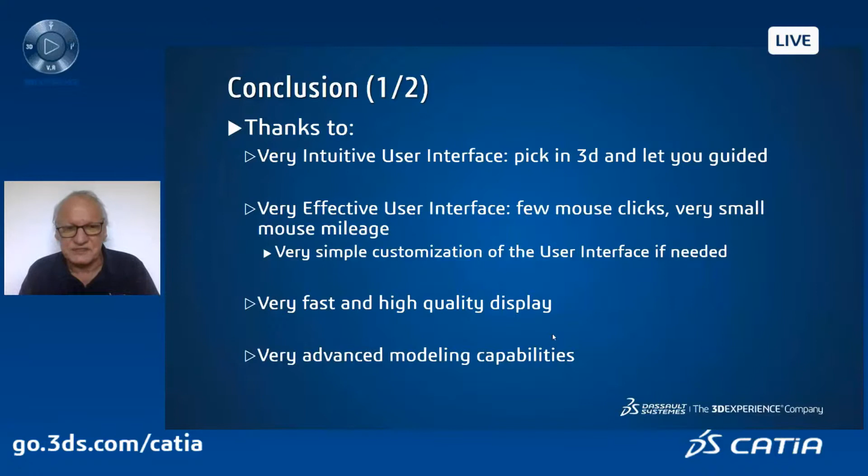The display is very fast and high quality, and you have very advanced modeling capabilities, which is one of the richnesses of CATIA, and continues to be a richness of 3DEXPERIENCE CATIA. So what are the benefits for you, guys and ladies? Casual users, it's easy to use. Casual users do not spend a lot of time just to know what to do in front of the screen. Expert users are very productive because they don't spend too much time opening and closing dialog boxes, just focused on the 3D and clicking on entities, and CATIA is popping up with the right commands.

And for existing CATIA V5 users, it's very simple to learn and very quick to master, okay? And we measured that the productivity when you are designing solids or surfaces can vary between 20 to 50%. So it's a great advantage to go to 3DEXPERIENCE CATIA, wherever you are starting from, and don't wait.